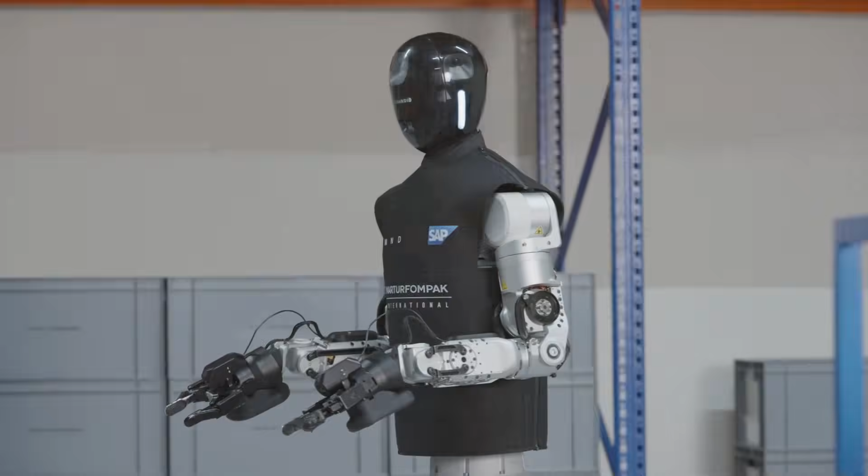A British robotics startup has just done something no one had done before. It convinced Bosch, one of the world's largest companies, to manufacture its humanoid robots at scale for the European market. And it was no symbolic handshake. It was preceded by a real test in a factory in Bühl, Germany, where the HMND 01 operated alone, without human supervision, handling 5 different sizes of boxes coming from multiple conveyor belts simultaneously.

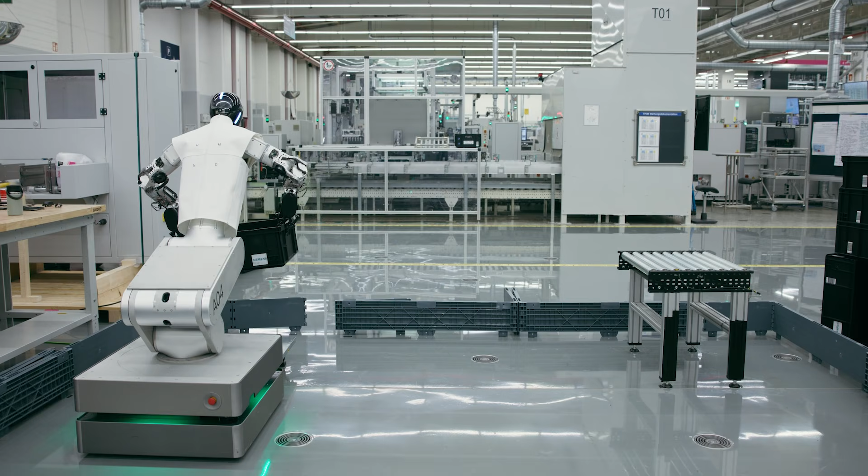And it passed. In the next few minutes, you'll understand why this deal changes the European race for industrial robots and what is really at stake behind two giants betting everything on the same robot. Want to understand it all? Then stay till the end, I'll explain everything.

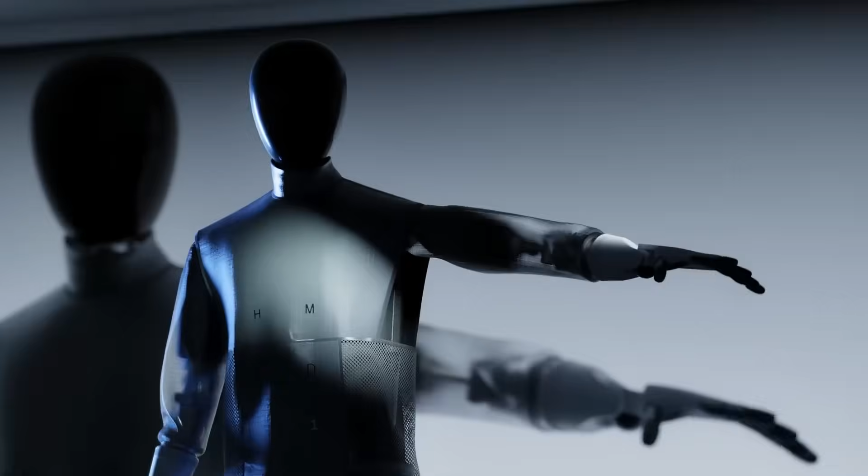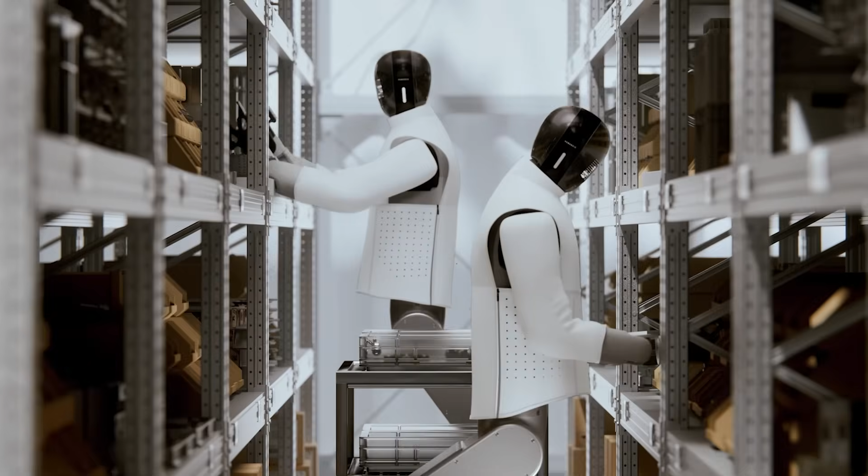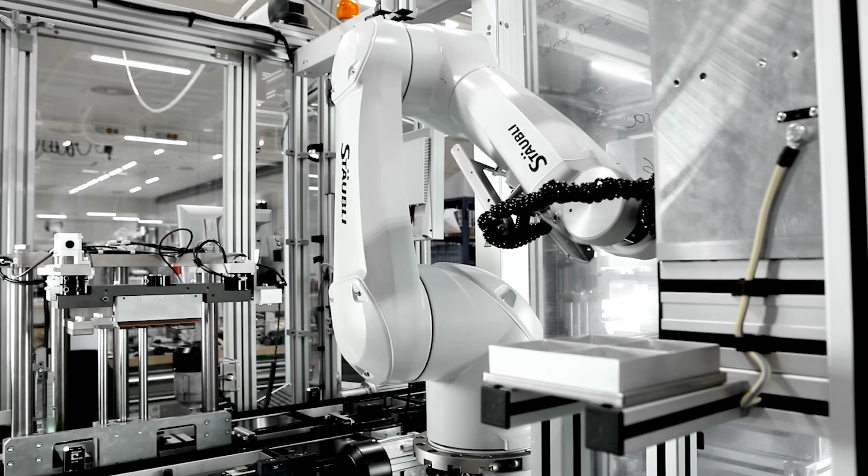Humanoid, a robotics startup based in London, published an official statement that stopped the industry in its tracks. Not because it was just another partnership announcement, but because the partner's name was Bosch. The German company founded in 1886, a corporation with more than 429,000 employees present in dozens of countries, known for manufacturing everything from spark plugs to ultra-high-precision industrial systems. And that is exactly what happened.

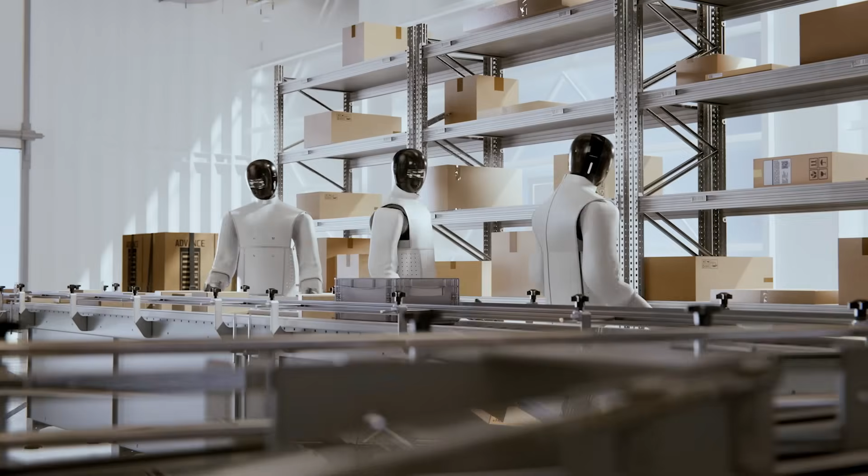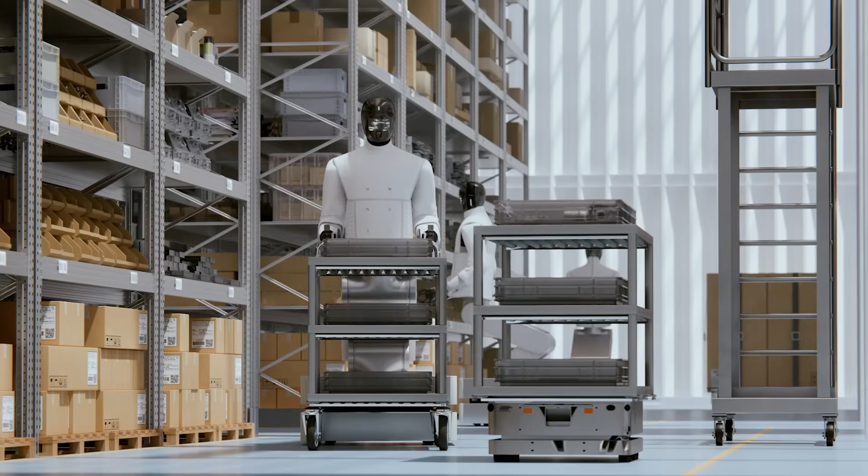The agreement formalized on May 21, 2026 turns Bosch into Humanoid's contracted manufacturing partner for the European market. In other words, Bosch will produce the HMND 01 robots at industrial scale. But what makes this announcement truly surprising is not just the weight of the Bosch name, it is what came before it. In March 2026, just 2 months before the public announcement, Humanoid and Bosch conducted a joint test at Bosch's internal logistics facilities in Bühl, Germany.

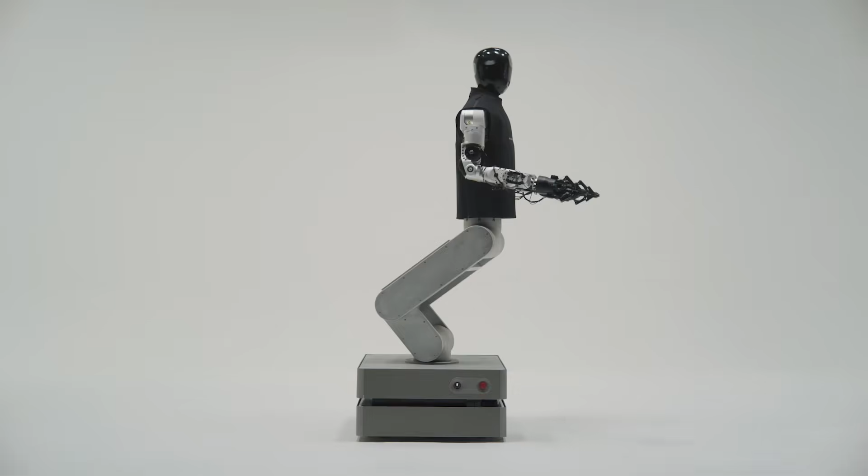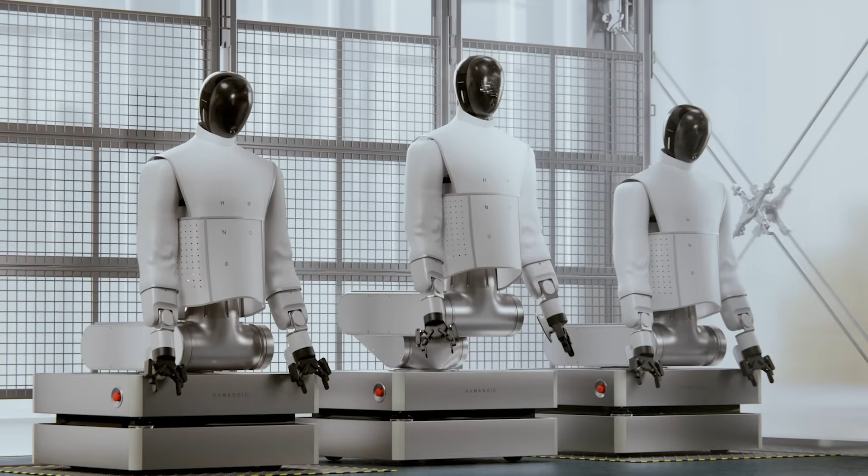The goal seemed simple, but was very difficult in practice. Put the HMND 01 robot to work in an internal logistics operation, without predefined scripts, without a controlled environment, and without needing human help at all times. The task? Transfer boxes from conveyor belts to transport carts used inside factories. It sounds simple, but the test was not conducted with identical boxes or in ideal conditions.

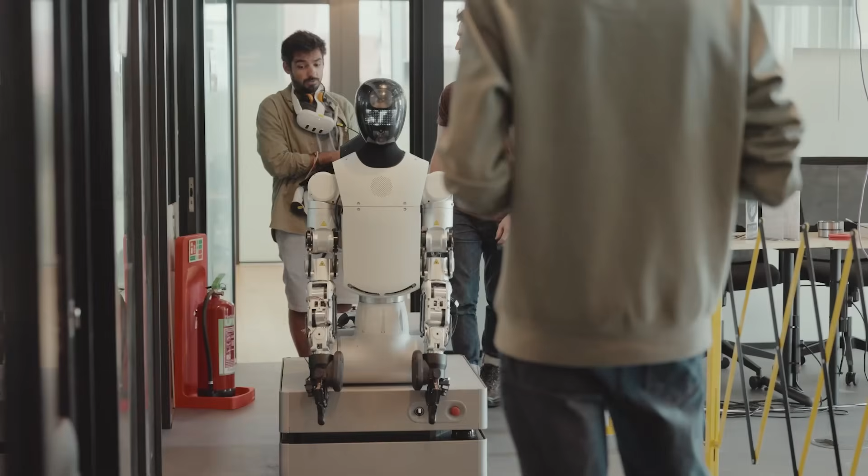The robot had to handle 5 different sizes of boxes, with variations in base area, height, and weight. All of this coming from multiple belts simultaneously, in a dynamic environment. The kind of environment that changes minute by minute in a real logistics operation. The robot passed. It met all the targets. It demonstrated that the hardware works and that the software adapts to real industrial environments. That was exactly what Bosch needed to see.

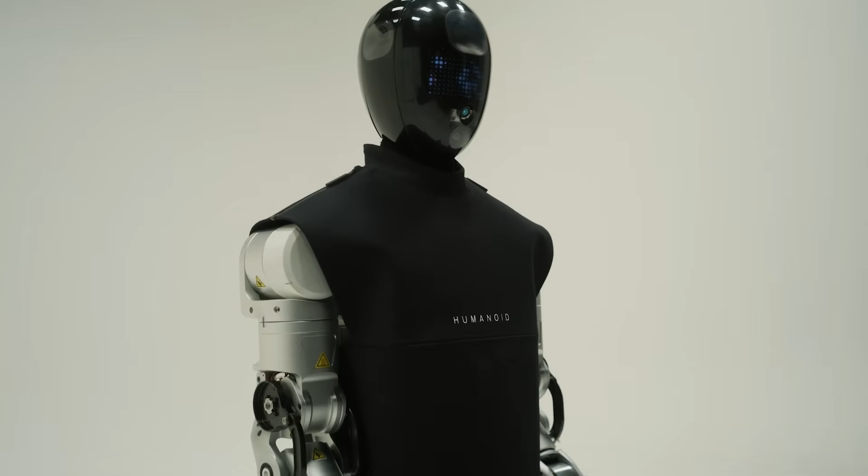In the industrial sector, there is an enormous difference between testing an idea and closing a production contract. Most companies take years to take that step. Humanoid took 2 months. Under the agreement, Bosch will not just assemble the robot. The company will apply its own development methodology to the HMND 01 design, a structured approach to improving the product on 4 fronts simultaneously. Ease of mass manufacturing, durability over time, ease of maintenance, and cost viability.

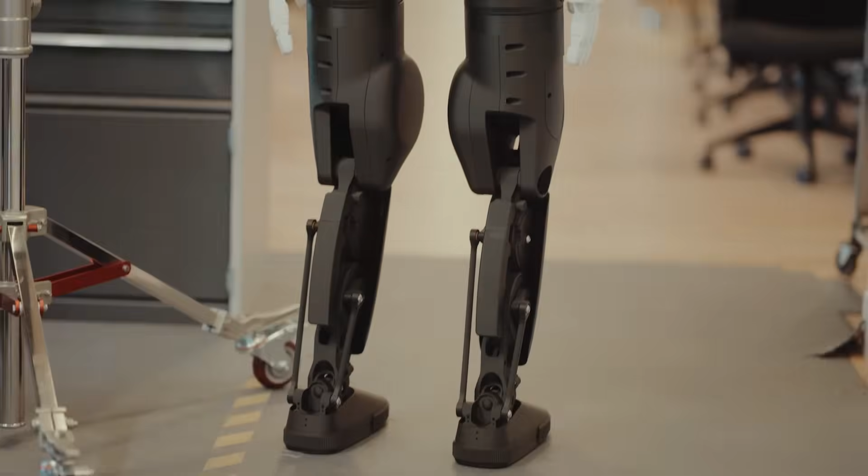In practice, this means Bosch engineers will work alongside the Humanoid team to redesign parts that work well in prototypes but would be expensive or difficult to produce at scale, replacing them with solutions that work equally well and can be manufactured by the thousands with consistency. To understand why this deal matters beyond the 2 names that signed it, it is necessary to step back and see what is happening in Europe.

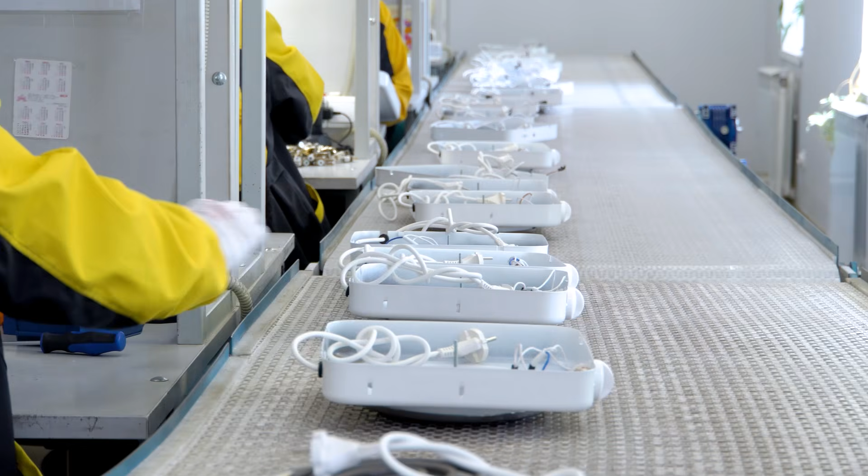Europe has a structural problem that is becoming increasingly difficult to ignore. Populations are aging faster than new generations can replenish the workforce. In Germany, the industrial heart of Europe, the participation rate of workers in the 55 to 64 age bracket has hit recent records, but even that is not enough to cover the industrial demand projected for the next decade. The logistics sector, in particular, faces workforce deficits that no immigration policy or wage incentive seems to fully resolve.

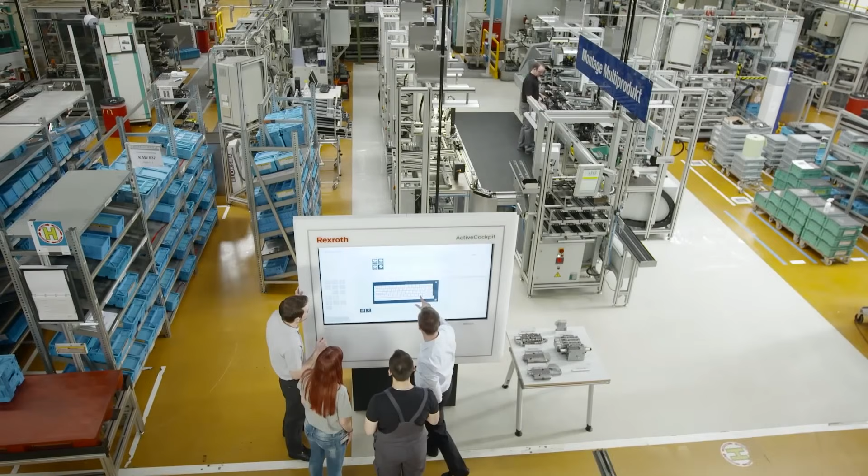Companies like Bosch do not choose robotics partners out of technological curiosity. They choose because they need an answer to a pressure that is real, measurable, and growing. And Humanoid arrived with something that passed a field test.

Bosch and Humanoid will also explore the use of Bosch's own components, such as actuators, sensors, and drives, in future versions of the robot. In other words, Bosch will not just be the manufacturer. It will also be a potential supplier of the robot's internal components.

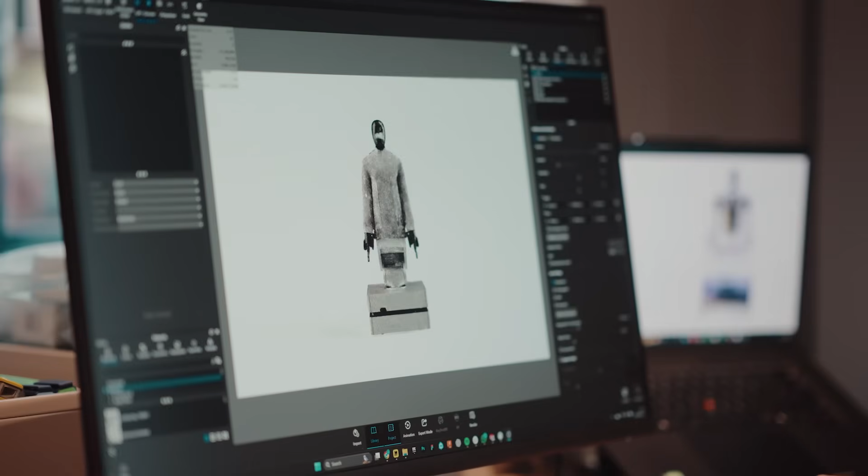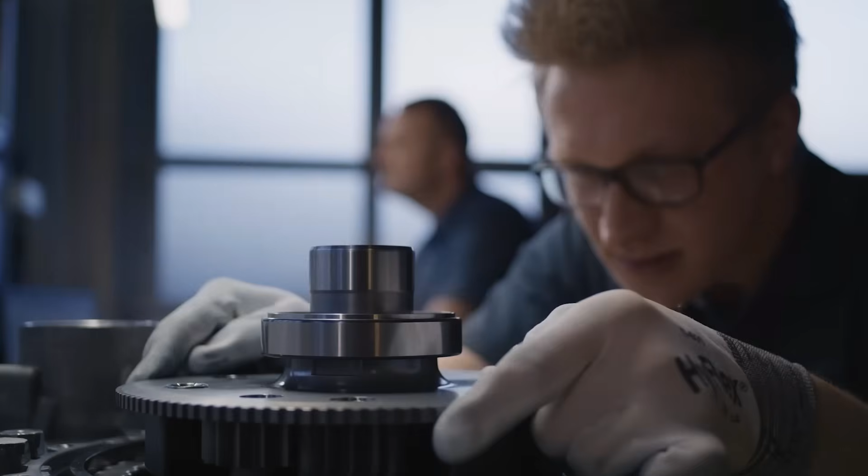In addition, Humanoid already has another major European partner, Schaeffler, which signed a binding agreement to supply more than 50% of the robot's joint actuators through 2031. Bosch and Schaeffler, 2 German industrial giants, both supplying components for the same robot, both betting on Humanoid's growth.

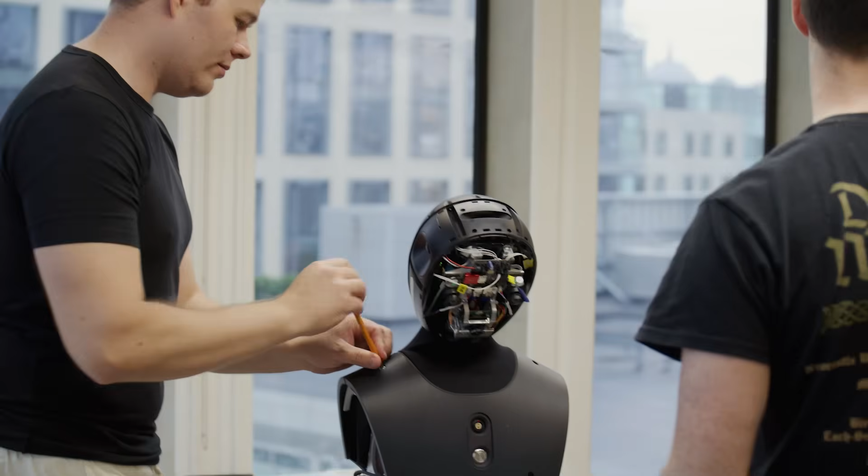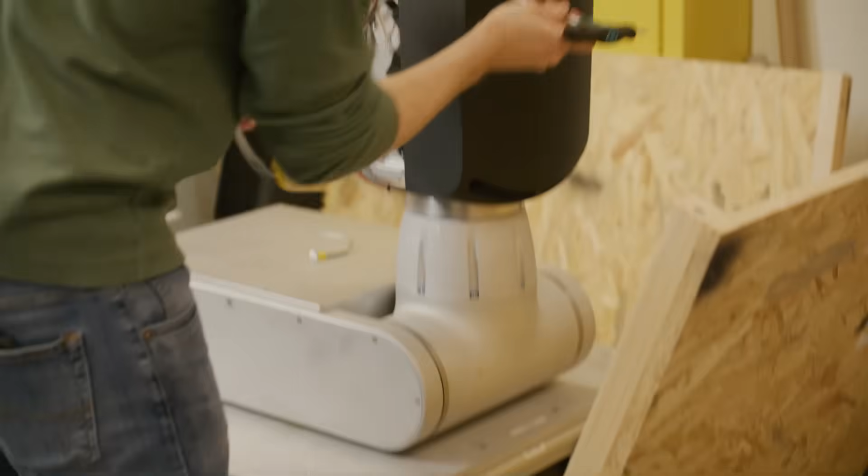Humanoid was founded with the premise of moving faster than any Western competitor, and the data from recent months suggests that promise is being kept. In January 2026, the company completed successful proof-of-concept runs at both Siemens Electronics factory in Erlangen and Ford's Innovation Center in Cologne. The most impressive number, 30,000 non-binding pre-orders registered. These are not signed contracts, they are signals of purchase intent.

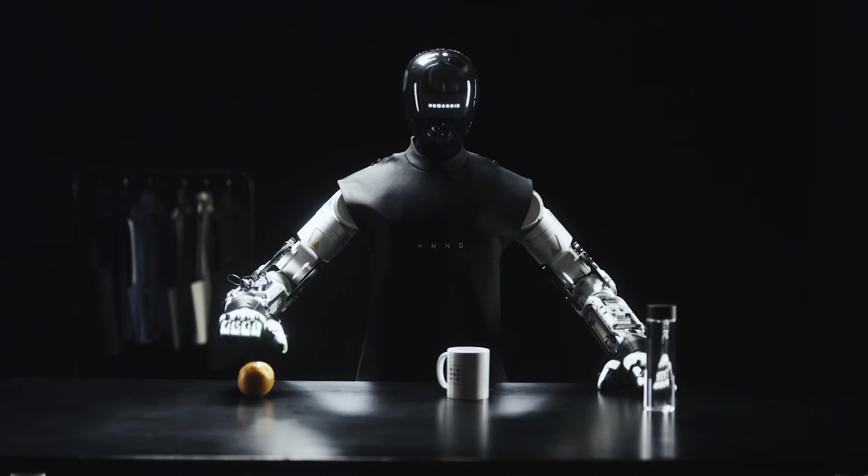The volume indicates that the market has already understood. Humanoid is already an established company and is advancing toward large-scale industrial production. And it has just brought Bosch, one of the world's greatest engineering companies, to its side to make it happen.

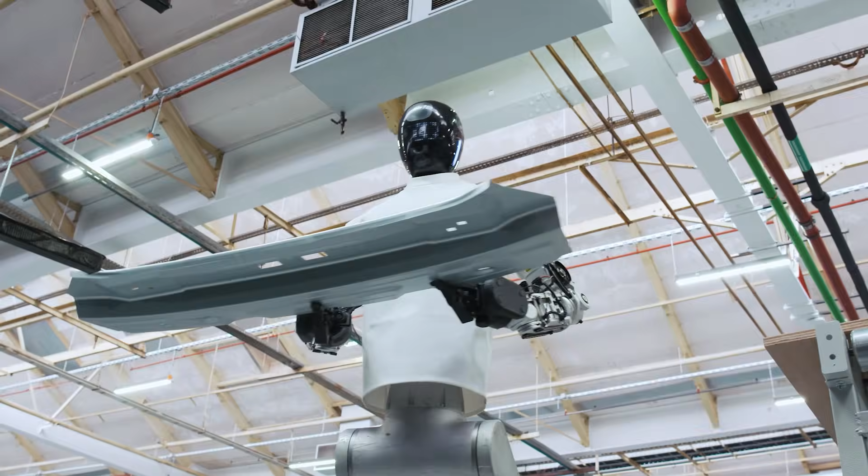However, manufacturing a few prototypes that work in a controlled test is one thing. Manufacturing robots by the thousands with consistent reliability at a cost that justifies the industrial investment, that is something completely different. And it is precisely in that transition from prototype to production that most robotics startups stumble. Does Humanoid have what it takes not to stumble? The answer begins with understanding how the HMND-01 works.

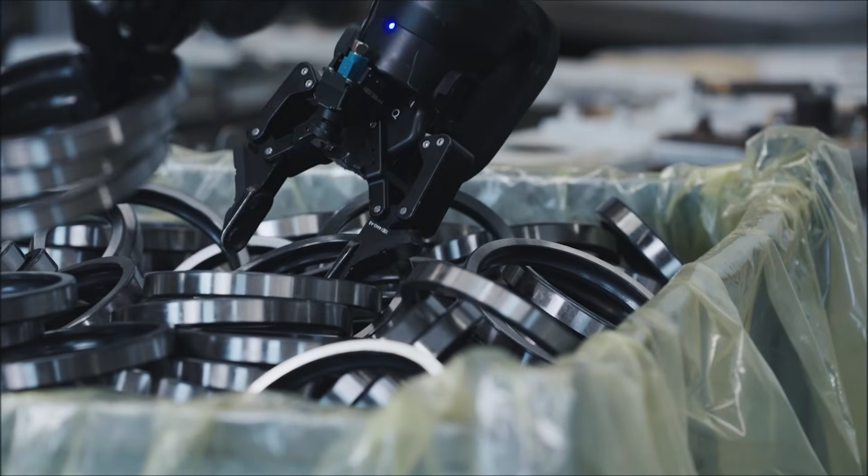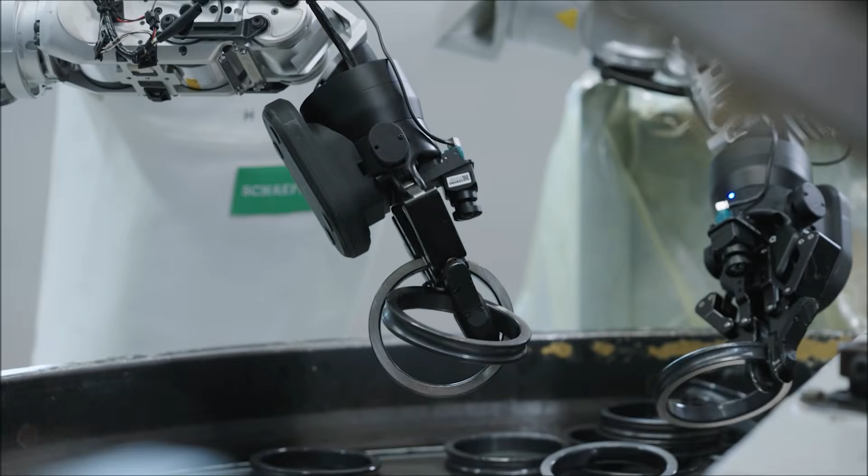Humanoid developed the HMND-01 in two distinct configurations. The bipedal version, with legs, is in development, with advanced locomotion tests underway. But the version operating today in Europe's factories, the one that completed Bosch's proof of concept and the tests at Siemens and Ford, is the wheeled version. The HMND-01 on wheels, as it is called in the sector, combines a wheeled mobile base, a torso with two high-precision arms, and a head equipped with visual sensors.

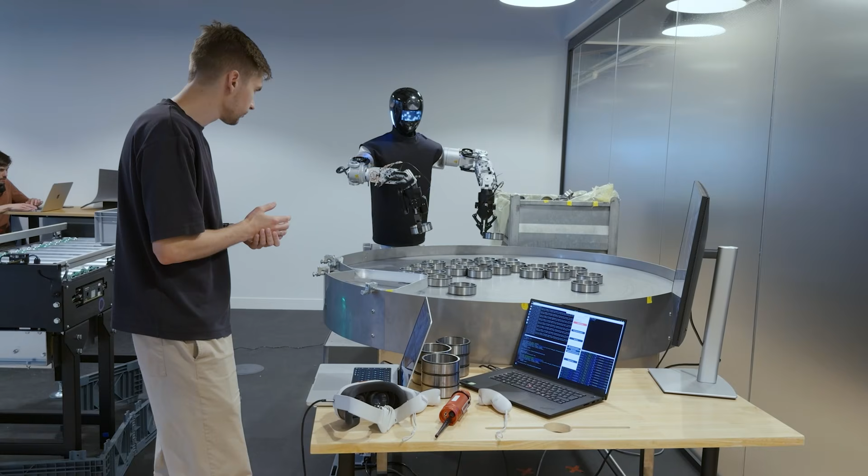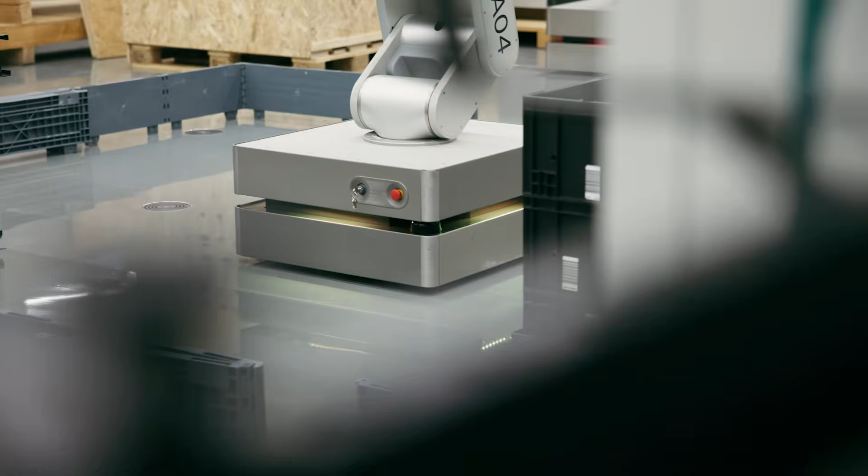The choice of wheels is not a limitation. It is a strategic decision. Industrial environments have flat surfaces, standardized corridors, and predictable workflows. For those conditions, wheels offer superior stability, more efficient travel speed, and lower maintenance costs than articulated legs. Humanoid is not trying to replicate human biology as a matter of principle. It is trying to solve industrial problems efficiently.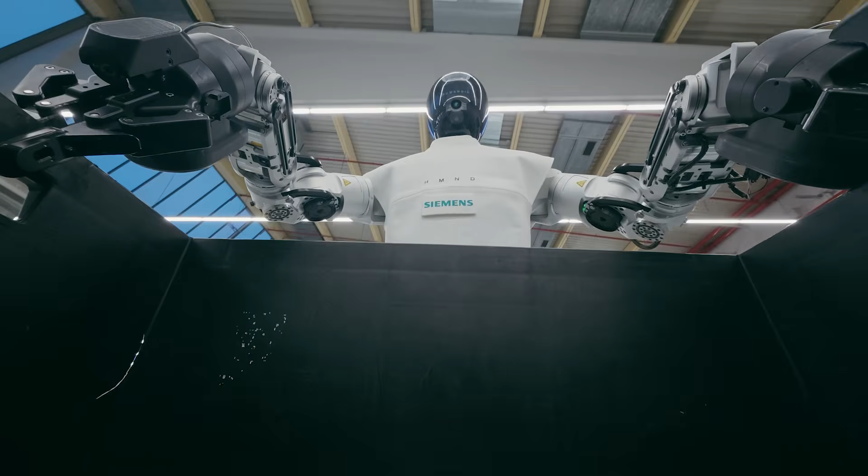Think of an orchestra conductor. He plays no instrument, but he coordinates dozens of musicians so they sound like one. Kinet IQ is the conductor of the HMND-01 and goes beyond that because it can coordinate entire fleets of robots at the same time. Kinet IQ is an artificial intelligence platform built on 4 layers that operate simultaneously at different speeds.

The top layer, called the fleet agent, acts in seconds and functions as the manager of the entire facility. It connects to the factory's management systems, reads the operating procedures, and distributes tasks among the available robots, swapping units between workstations when necessary to maximize uptime.

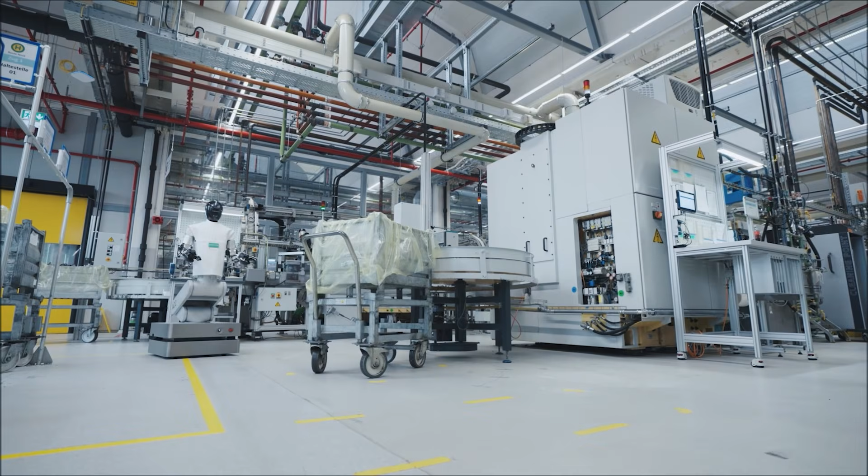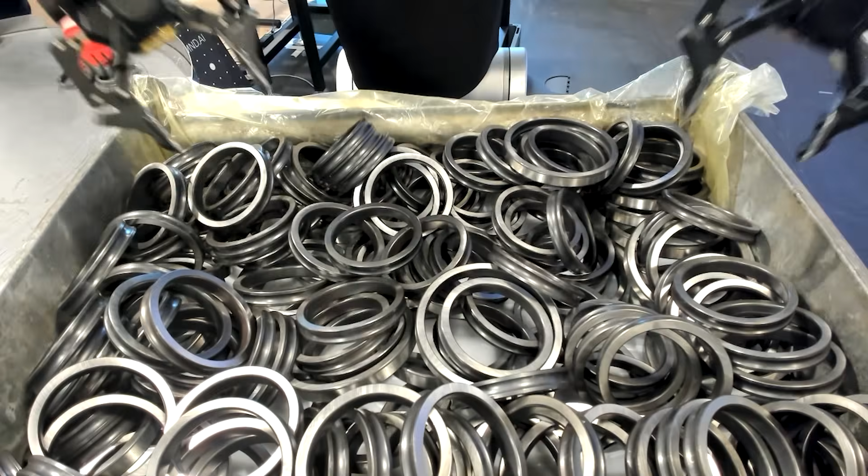Just below, the second layer handles the individual reasoning of each robot. It uses a multimodal language model, capable of processing text, images, and sensor data simultaneously to break down general instructions into executable subtasks. What makes this different from a robot programmed with fixed rules is that this layer dynamically updates its plans based on what the robot is seeing. If a box is poorly positioned on the belt, the robot does not freeze.

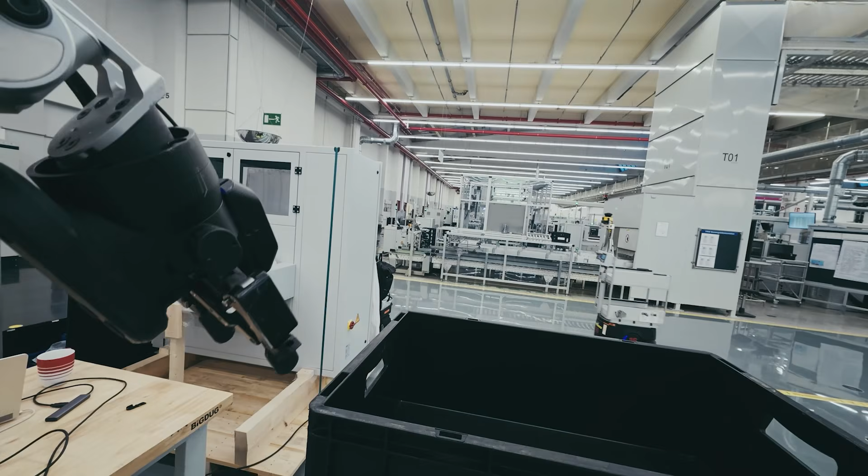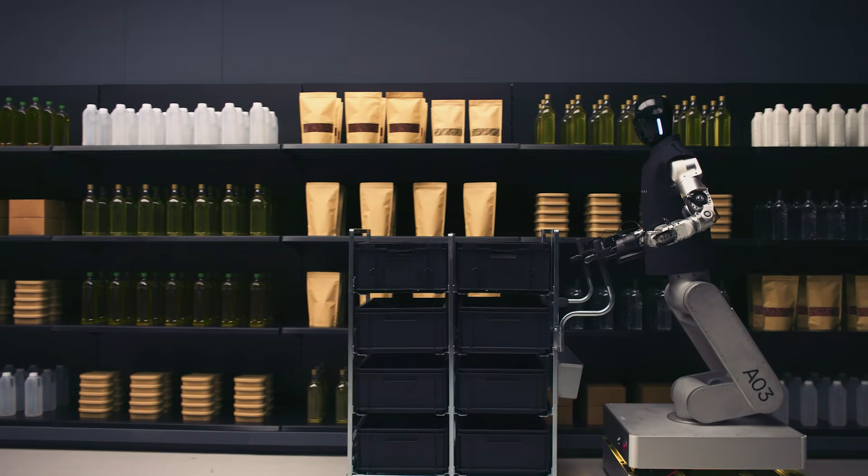It recalculates and acts. The third layer is responsible for the immediate execution of physical tasks. It operates in fractions of a second and commands the target positions of the robot's hands and torso. To ensure fluid movement without those strange robotic pauses between one gesture and the next, Kinet IQ uses a technique called prefix conditioning. While the robot is still executing one movement, the system is already calculating the next.

The fourth and most fundamental layer controls the robot's balance and stability in real time, at 50 cycles per second. It uses reinforcement learning, a method by which the system improves its performance through trial and error in simulation, to ensure the robot remains stable under any operating condition.

And most interestingly, this layer works in both the wheeled and bipedal versions, because it was designed to adapt to different morphologies. Additionally, the company claims it can teach the robot a new behavior, starting from scratch, in simulation, and have it running on a physical robot in just 24 hours. Think about what that means in practice.

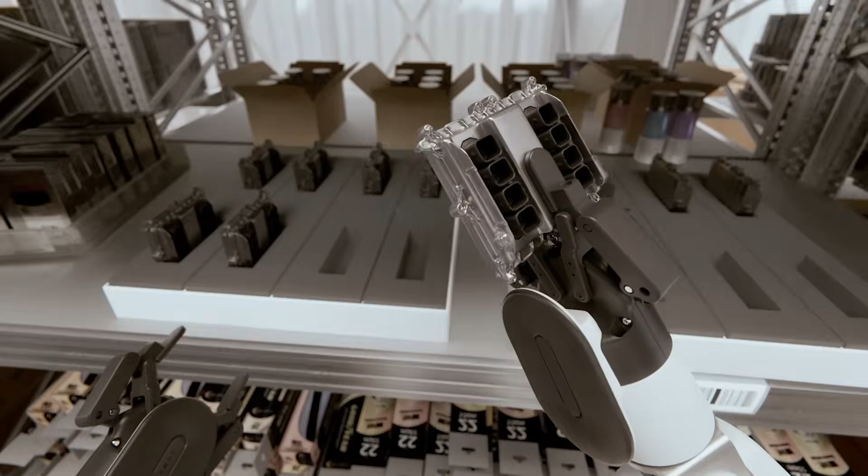A factory decides it wants to use the HMND-01 for a new task. Instead of waiting weeks for a scheduled software update, the robot can learn that behavior in a day. This does not just transform Humanoid's agility as a company, it transforms the product's value proposition for the industrial customer. The robot is not a tool with fixed functions, it is a platform that can be taught.

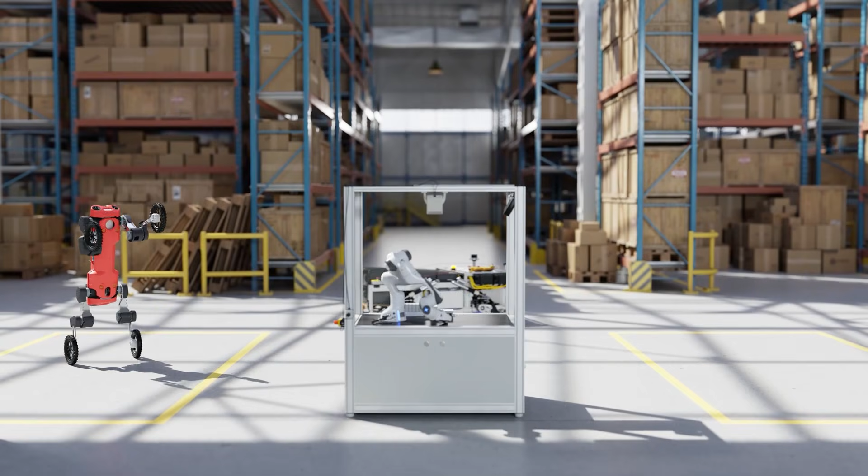This rapid training cycle is possible because Humanoid built its artificial intelligence architecture in a simulation environment called Isaac Sim by NVIDIA, a platform that recreates physical environments with high fidelity and allows testing behaviors without risk of damage to the hardware. With Jetson Thor, an NVIDIA processor developed specifically for humanoid robots, Humanoid transfers behaviors trained in simulation to the physical robot with a success rate that, according to the company, grows continuously.

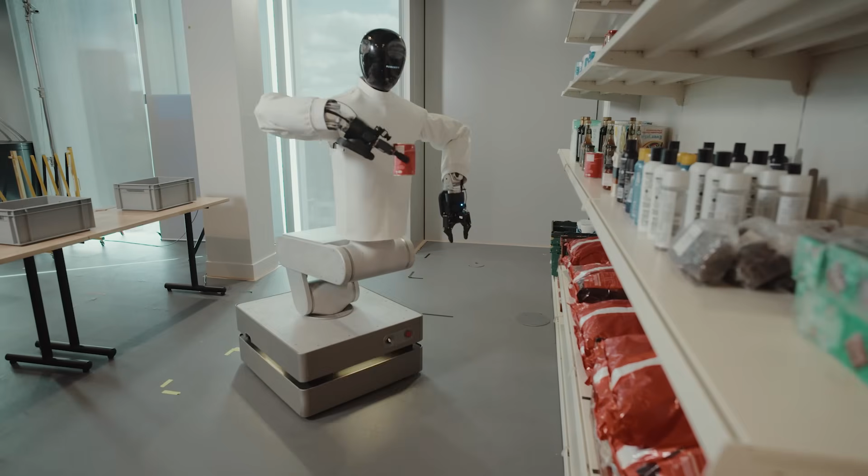The partnership with Bosch comes in exactly here. Bosch will apply to the robot a methodology aimed at making it viable for large-scale industrial production, not just functional as a prototype. This involves redesigning parts for the assembly line, ensuring durability in prolonged use, facilitating maintenance when something fails, and cutting unnecessary costs that would make mass adoption impractical.

But what can this robot already do? And what can it not yet do? That is what I am going to tell you now. At Ford's Innovation Center in Cologne, the HMND-01 operated with 2-arm manipulation on automobile body parts, thin metal sheets with sharp edges and irregular geometry.

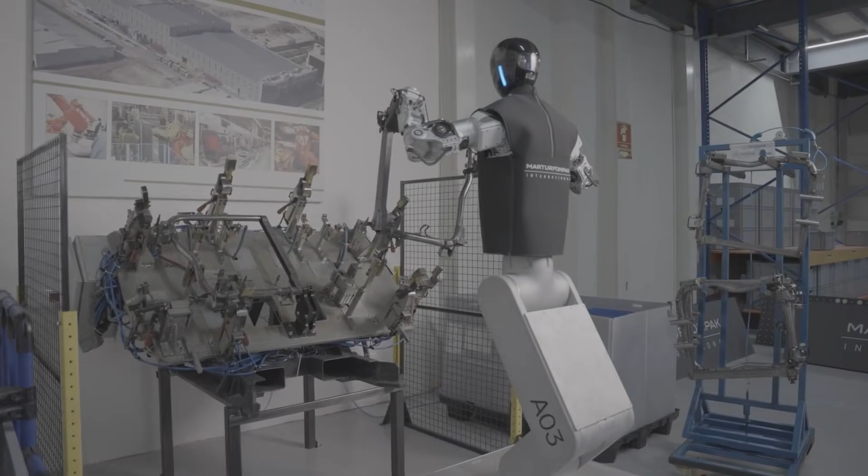This is the kind of task that traditional automated systems fail at frequently, because any millimeter deviation in the part's position can generate errors. The robot finished the shift with a 97% autonomous success rate and reached 83 units per hour, 60% above the target set by Ford.

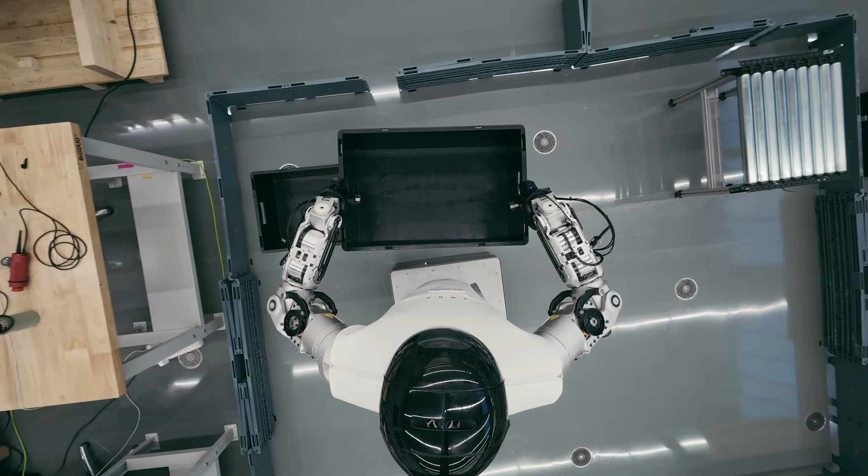At Siemens' electronics factory in Erlangen, the robot performed tray-to-belt transfer operations for more than 8 continuous hours, maintaining a success rate above 90% in autonomous pick-and-place operations. 8 hours of operation without human intervention is a milestone for robotics.

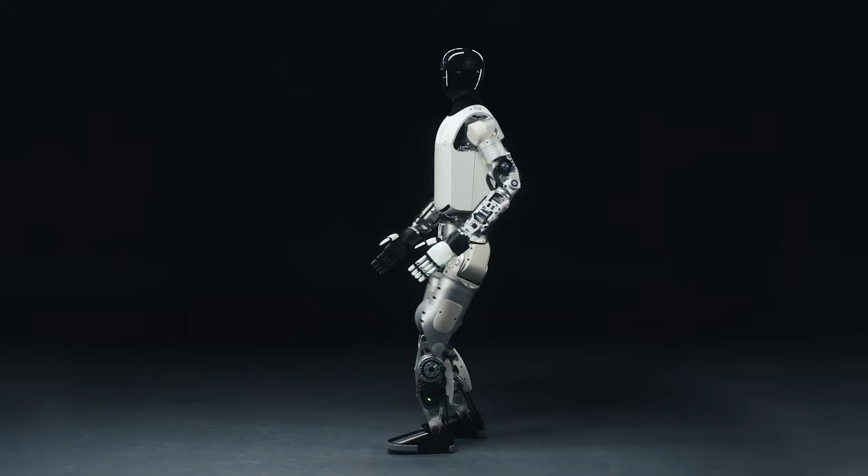However, the wheeled version of the robot, the one in the production phase, does not operate on stairs, uneven terrain, or outdoor environments. The bipedal version is still in advanced development, with locomotion tested internally, but not yet validated in the field with the same depth as the wheeled version.

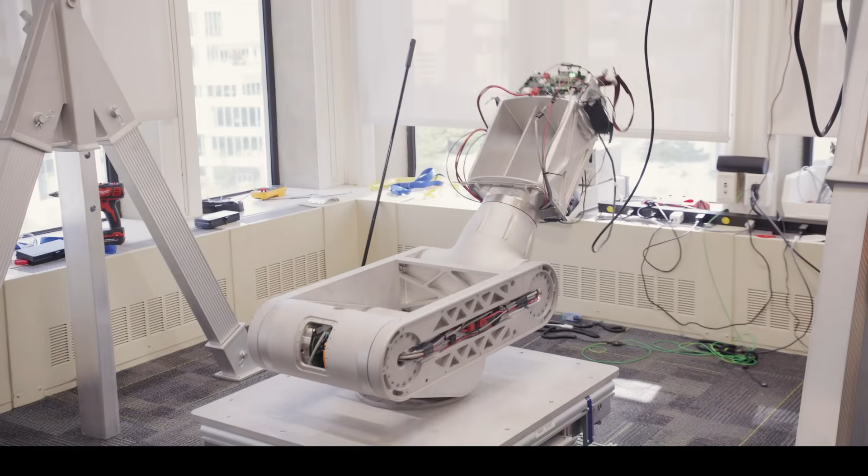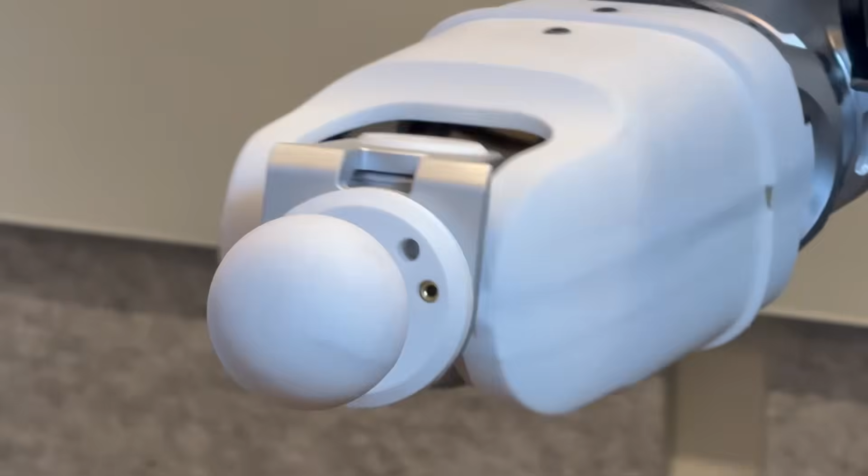The autonomous success rate of 90% to 97% recorded in the tests is impressive for the current stage, but it leaves a margin of failure that, at industrial scale, needs to keep falling. In an operation that processes hundreds of items per hour, every percentage point of failure represents real errors with real costs. The company has not yet disclosed complete data on battery life in intensive continuous operation or on recharge times for sequential cycles. These are information gaps that matter for large-scale adoption.

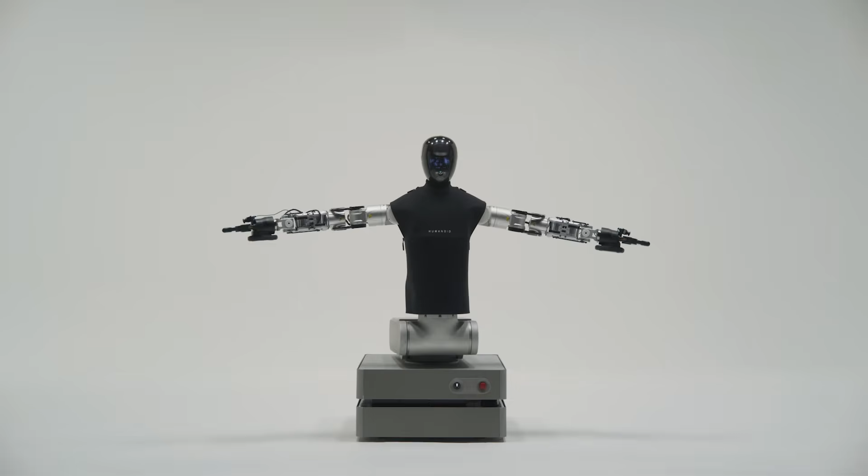Humanoid does not promise perfection. CEO Artem Sokolov himself describes the current phase as a beta product mindset, meaning the robot is still being refined as it operates in the real world. That is an honest stance. But it also requires industrial customers to tolerate imperfections, and for Bosch, as a manufacturing partner, to help reduce them systematically.

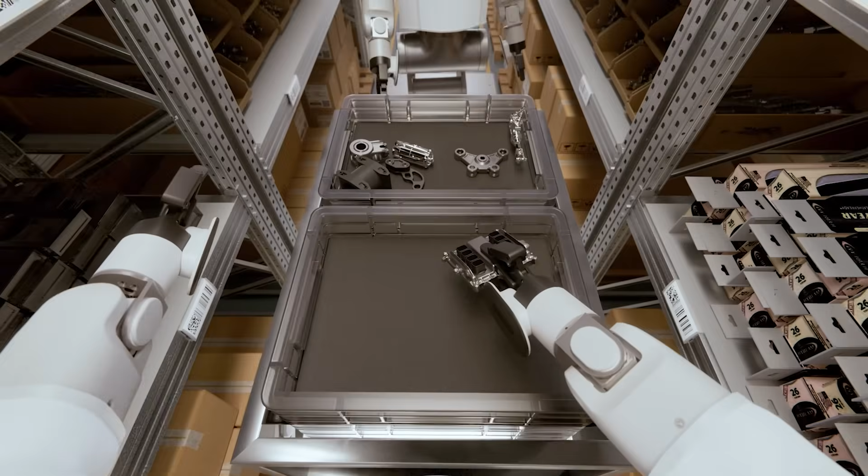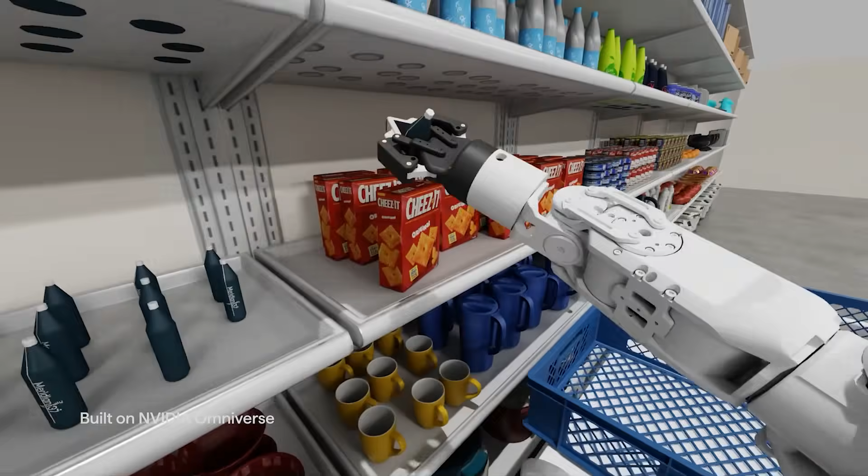What will happen in the coming months, mass manufacturing, deployment in factories across Europe and the world, will be something unprecedented. And in the long term, it has the potential to completely redefine what we understand as industrial production. The future is promising. If robots like the HMND-01 begin operating in European factories by December 2026, and if the reliability numbers stay where they are, what should be the role of workers in those factories? Should automation complement human work or replace it entirely? And who should decide? Companies, governments, or the workers themselves?